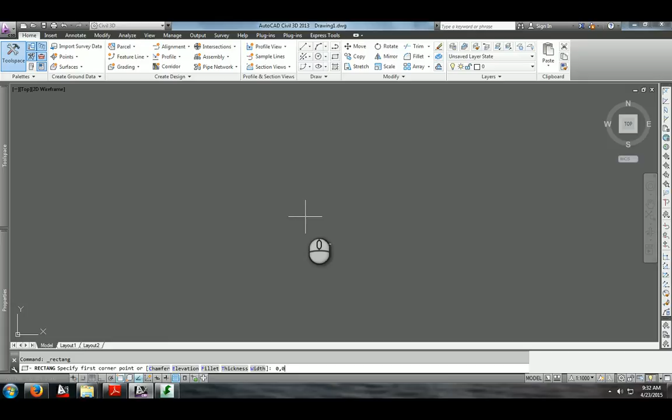So I click the Rectangle 2 tool, and you're going to type in 0,0. It should be down there in your command line. Click Enter, so now you're at the origin. Type in D for dimension, and go 700 by 800.

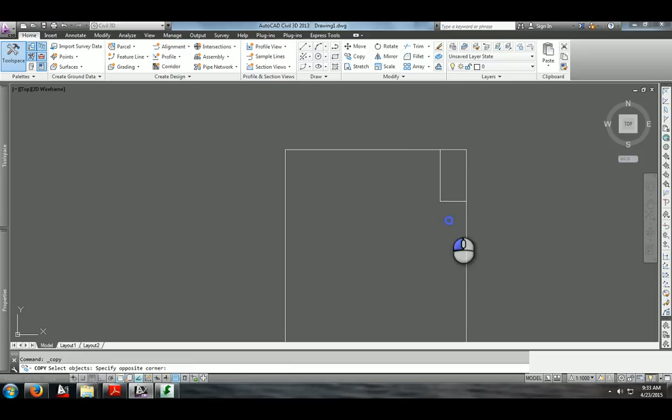Then voila. Click a rectangle tool, go here, and then go dimension 100 by 200. Then we're gonna do copy. No, I don't want that.

We'll fix that. Select them all, go to copy, and we're drawing — I'll show you what we're drawing after this, I didn't show you guys yet. So delete, we're gonna eventually come across to this.

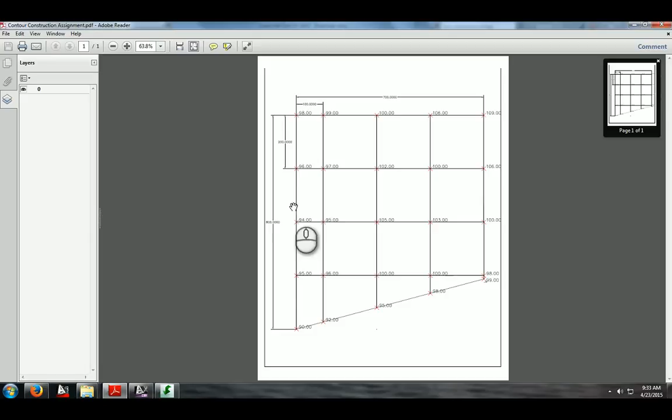It looks complicated, but we don't have to do the dimensions, and it's not that hard. We're already halfway done. So I'm gonna draw a line.

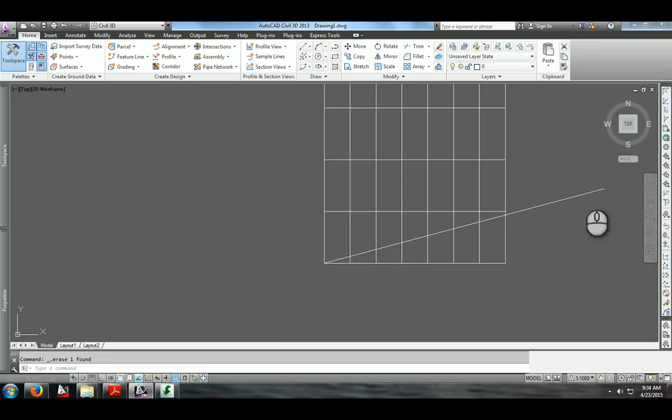That was fancy, I don't know why I did it that way. I'm gonna do that again. It doesn't really matter, just kind of make it look like the one in the picture I showed you. I'm pretty sure when this gets assigned, you guys are gonna get a handout that shows what it's all gonna look like, so it shouldn't be hard.

Enter. Type that, and then I'm gonna trim a bunch of stuff. Make sure you're trimming the same stuff I am. If you mess up, then you have to redo it.

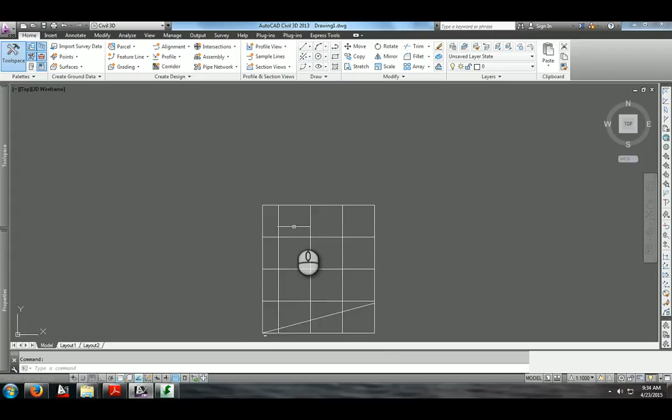Cancel. So now you should have this. I forgot, damn it. Alright, so we're going to do trim again. Delete, delete. And then we're going to type in POINT for point.

And we're going to place a bunch of points. I hope you're ready, but it's very important the order that you're doing it in. If you're not doing it the right way, then you'll screw yourself. So just believe me.

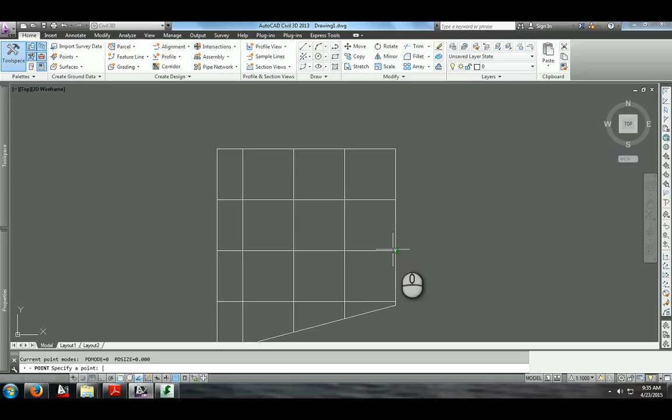So always do from left to right, or at least have a pattern that you can remember for when you go back, because you're going to have to go back to these points. Alright, so we have all those points.

We're in Civil 3D. We're going to go to Points and do Convert AutoCAD Points. Select the whole thing, click Enter. It should say... oh, it said 25 points found.

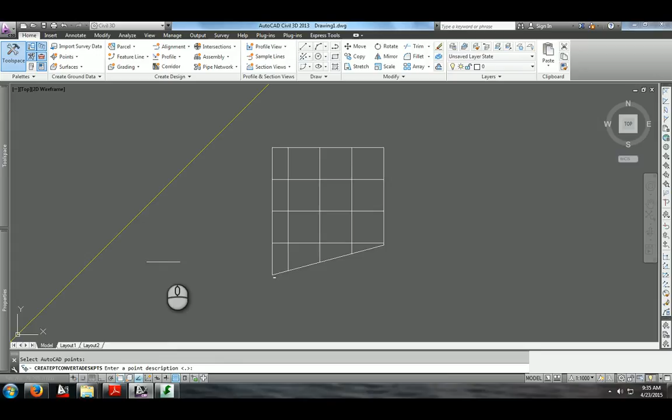Just keep clicking Enter every time. It'll have a bunch of red dots show up — these are your Civil 3D points.

Very important. Okay, so if you go to the Toolspace and you select Points, you'll see that all they have are easting 0 and northing 800. So this is point 1 it's talking about.

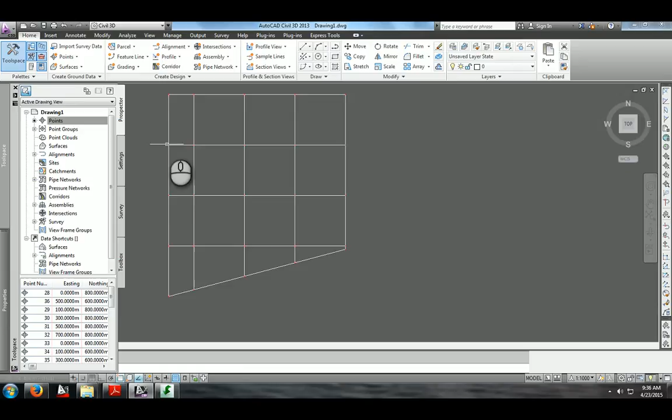It means from the origin, which we set the rectangle at here, it's easting nothing and going up 100. And if you select the COGO point, it says easting 0, northing 0. It's at the origin.

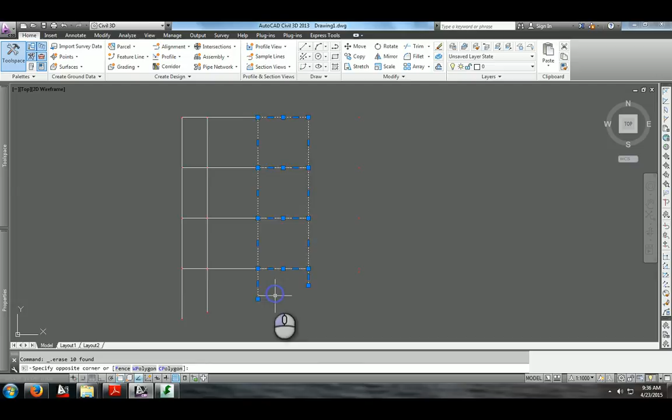Now from here we can do a few things. For starters, we're gonna delete the shape.

Then we're gonna go into here, and we get to go and change the elevation of — where's elevation? Point elevation.

I think if you go to here and go to Properties — okay, that's easier. If you select the point and you go to Properties, you can find elevation somewhere in here. I'm sure it's here. There you go.

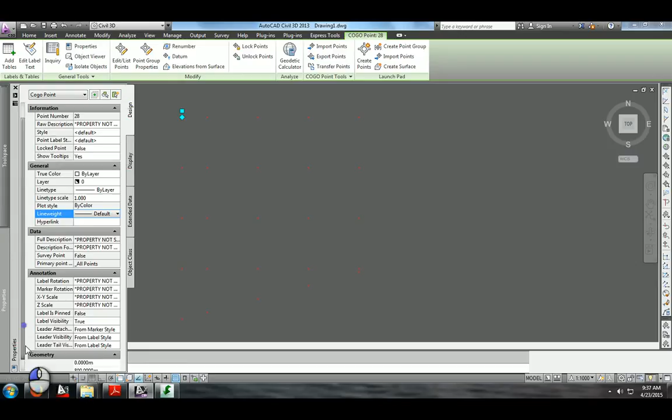Point elevation. And then you cross-reference with the PDF I have on the other screen, right here. That elevation is at 98, so since you selected the same point, you would go to 98. Oh, maybe you wouldn't — try again, 98.

And then this is 99, so we're going to go to Properties. I am too zoomed in.

Okay, so just keep selecting your points and changing the elevation of each of them. This is a long and strenuous process, and I hope you dislike every second of it. But it'll have a purpose — we get to start doing cool stuff with all this.

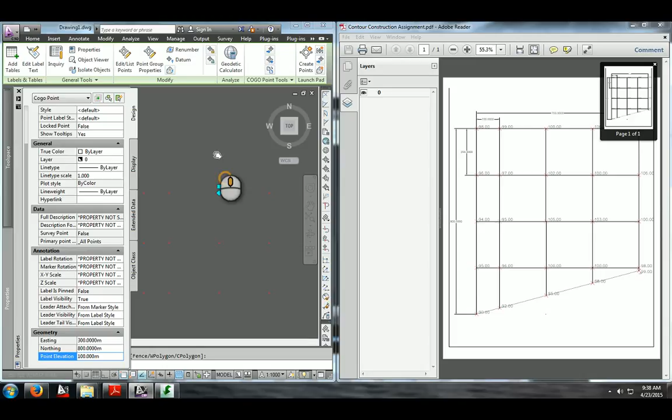And eventually, when you do the whole thing, you get to export them. You do that through making this full screen first. Go to Points, go to...

No, that's not it, I think it's in Toolspace. Right click, Export. You want them in PNEZD comma delimited, destination file. You're going to click the magnifying glass next to the file, select Desktop, and name it Contour.

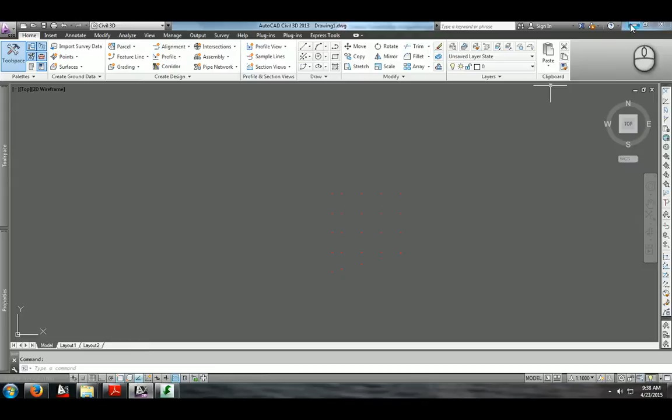Construction Civil 3D, and then your name. Open, and then click OK. For this lesson, you're turning in a picture of this, and you're turning in your file completely done with all your elevations, wherever I may have it right here.

So you're going to turn that in, and you're going to turn in this. And that's it for this lesson.